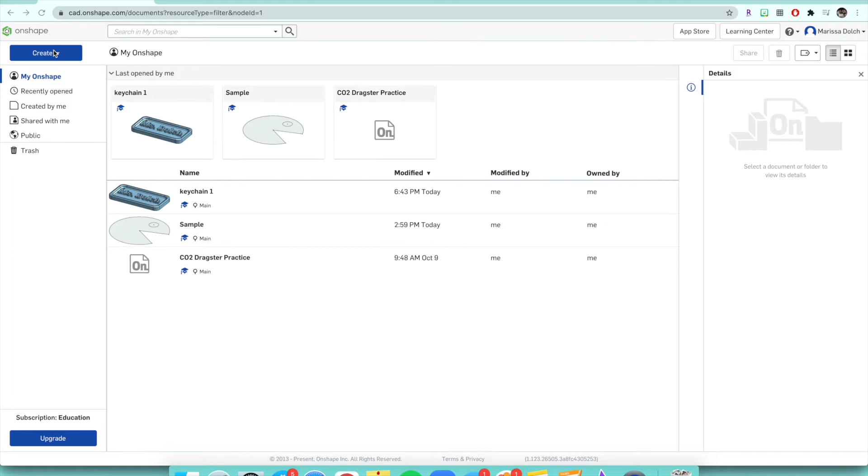But to get started, what you're going to do is click Create, which is the blue button on the top left. Then you're going to click Document to create our new file. You're going to put your last name and keychain, then click Enter or OK, and it'll load your workspace.

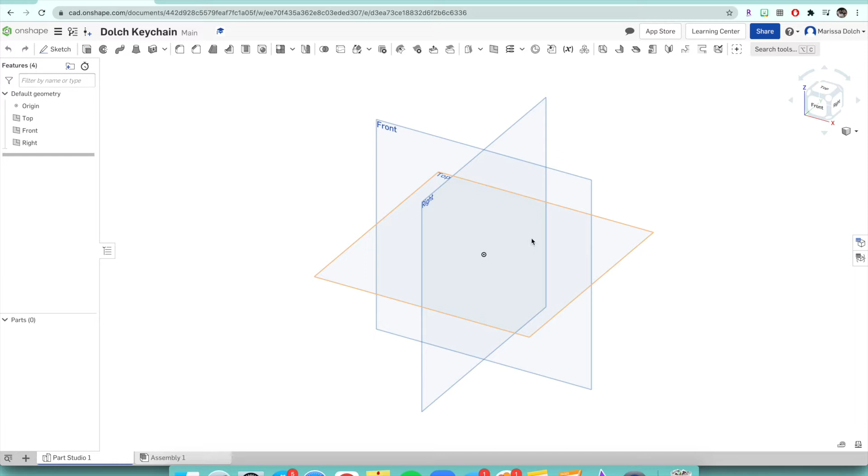So now since we have our workspace all loaded, like I mentioned before, I like to use the top view on the view cube in the top right corner, and it just snaps right to it, so it's kind of looking down on your design from the top, like a bird's eye view. So now what we have to do is select our top view and click Sketch to create a sketch on that top plane to get started.

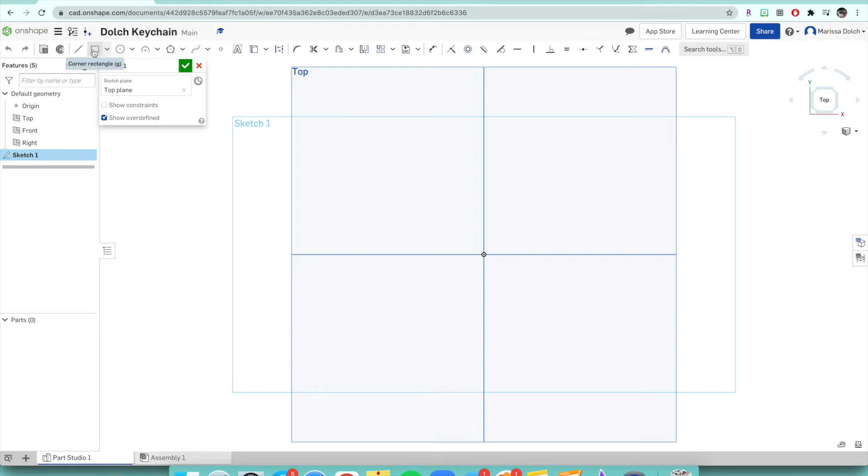So we're going to be making a rectangular keychain. What you're going to do is come over here to the rectangle button, and you're just going to drag a rectangle on. Click once to start dragging and click again to snap the rectangle onto the sketch. Now what we're going to do is dimension this rectangle.

What you have to do is go up to the dimension tool, and you're going to click on one line and bring up a dimension for it. Doesn't matter where it goes. You're going to make this dimension 3, for 3 inches. Then you're going to click on the width of this and make it 1.5 inches. And it should look like this.

Now what we're going to do is round out the corners of our keychain because we don't want it this pointy. So the tool that we're going to use for this is the fillet tool. What this tool does is rounds out corners so they're smooth and not as pointy.

So to use this tool, I'm just going to click on it, and I want to round out this top left corner of my rectangle. So I'm going to first click on this line, and then click on the other line that it connects to, and it'll round out the corner. You'll see that blue line where it's rounding.

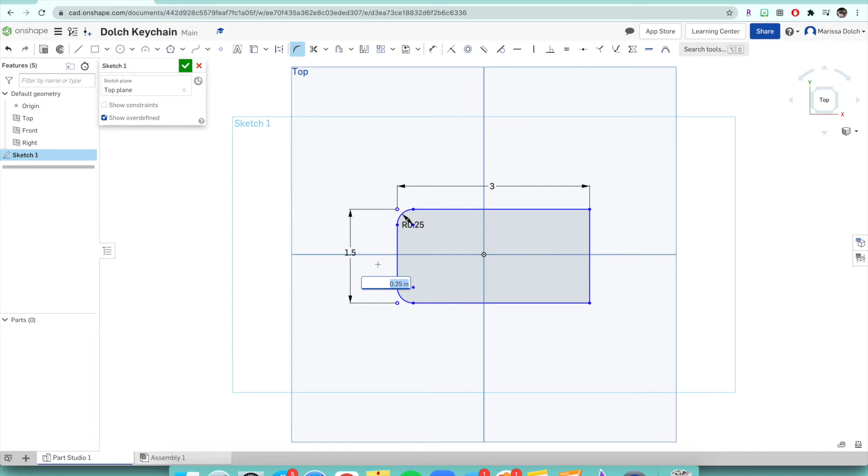We're just going to keep it the dimension that it's preset to, that it defaults to, which is nice. So you're just going to click Enter, or click off to the side, and it'll change it to make it round. You're going to do the same thing with the other corners, and just keep it the default, so you should be able to do this fairly quickly. And you're good to go.

So now what we're going to do is create an offset, so there's like a little ledge in your keychain. What you're going to do is on the top, two buttons to the right, there's an offset tool. You can click on that offset tool, and this is how you're going to make your ledge.

You're going to click on your edges, and right now you could just leave it how it is, and when it pops up the dimension box, you're going to make it 0.125, so that's 1/8 of an inch from the outside edge. You'll see now it moves a little bit closer. So that's a nice edge.

So we're going to do that to every single side. So again, 0.125.

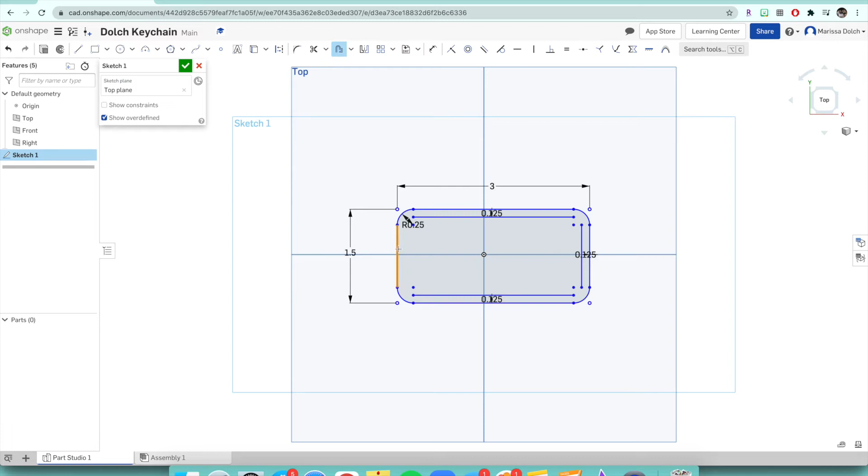And you'll see here for this one, the line looks like it's outside of the drawing. So to make it go inside, because we want it on the inside of the keychain, not the outside, you'll just click on this arrow and it'll move right in there. So when you click Enter, it'll still pop up with that box. Same thing with this one: just click the arrow inside, click Enter, 0.125, Enter, and we're good to go.

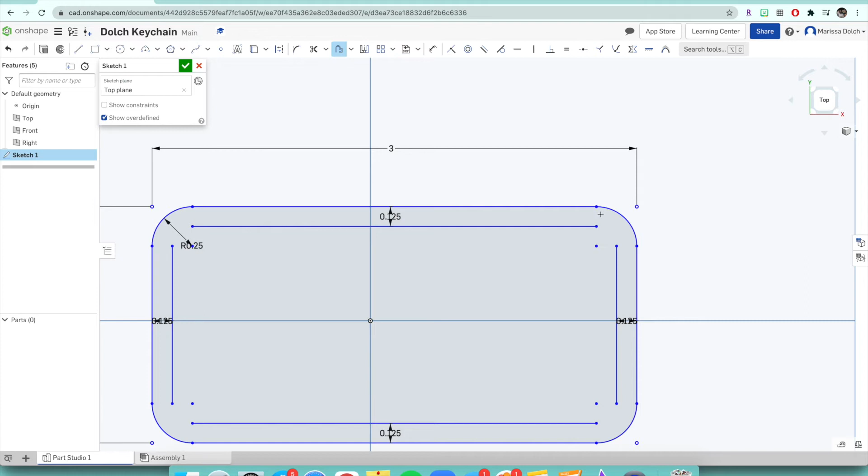But now if you look closely, this is a big gap. So we're going to do the same thing we did up here with the fillet tool and create a curve between these two lines.

So again, I'm going to click on the fillet tool. I'm going to click on one of the lines, then click on the connecting line where I want it to go. Click enter. We'll keep it the same exact default dimension, so you don't have to do anything there. And you're just going to go around to each corner and round it out.

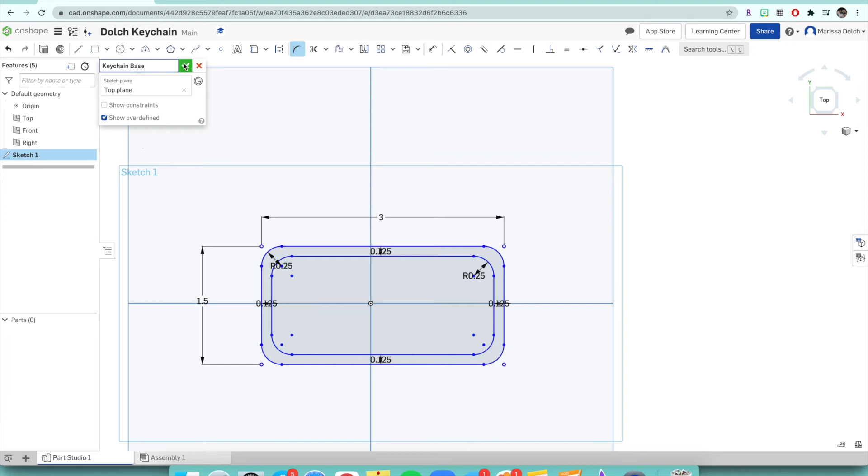Alright, so once you have that all done, our one sketch is complete. You can see up here it says sketch 1. I'm going to name this, just so I can keep organized, Keychain Base, just in case we have to come back and edit it. Once you're done, click the green check mark, and you'll see that our sketch is good to go.

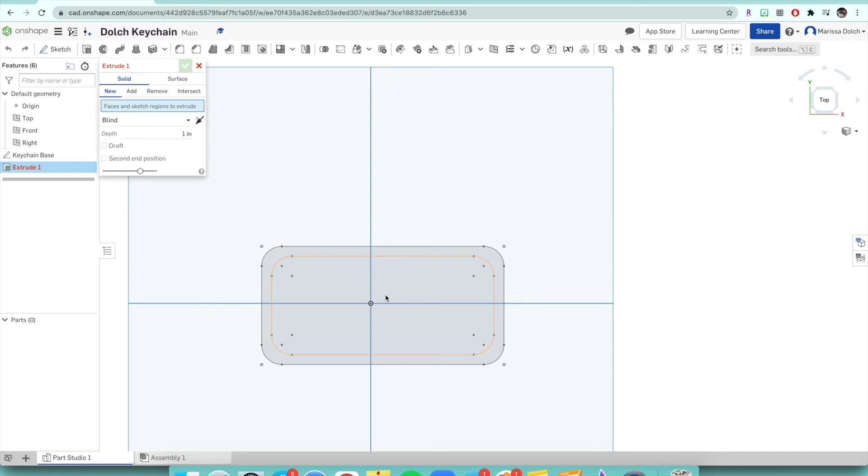So now what we're going to do is extrude our sketch. The extrude button's right up here, so click on it. Now we have to select a face, the part of the sketch we want to extrude or add material to. First we're going to do the inner piece. When you move your mouse to the center of your keychain, the inner line becomes yellow, so that's what you want. Once it becomes yellow, click, and it'll shade a dark gray. Then you're going to change this depth to 0.125, and click enter. You won't really notice a difference.

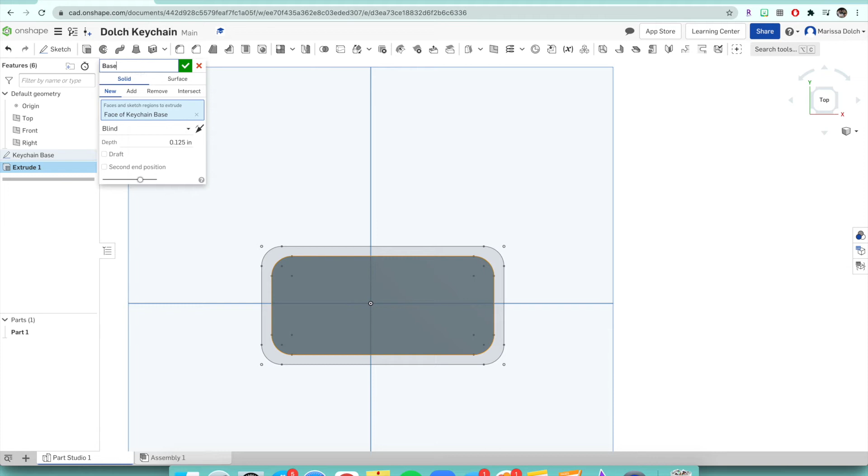Let me just rename this also, I'm going to name it base. You won't really notice a difference yet. I'll move around, but you can see once I move the sketch that it has become a 3D object. It's not just a 2D dimensional drawing, which is kind of cool.

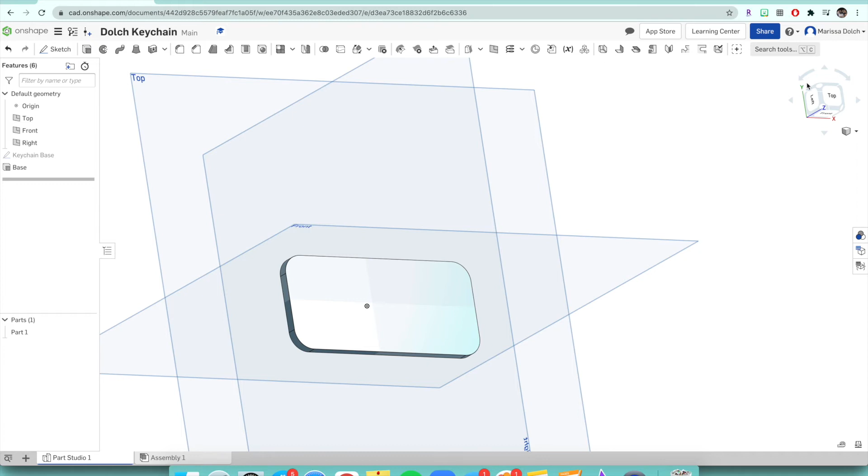But now if we look, your drawing disappeared, right? Don't get nervous that your drawing disappeared. All you have to do is, you'll see over here where we put keychain base, if I hover over it, you'll still see the drawing on the screen, but it won't be there because right now it's hidden. So we want to show that by clicking on the eye, and you'll see it pops back up for you.

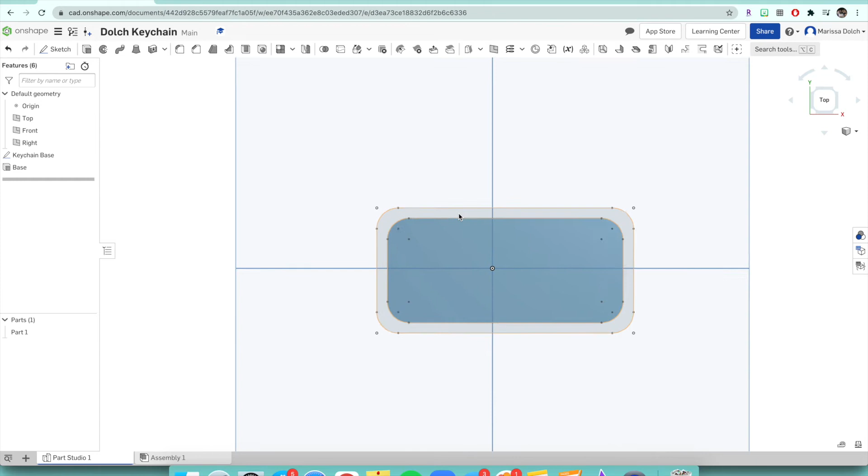So now we have to do the outside. What you're going to do is hover in between that middle light gray. Let me get a little bit closer here. You're going to click extrude. Now for this one, because this is our ledge, we want to add materials. 0.25, and you're just going to click enter, and it should extrude it.

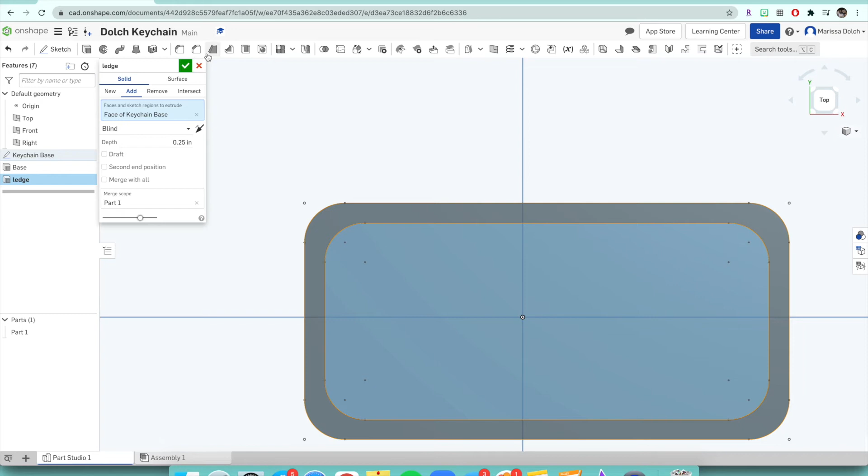So I'm going to rename this before I take a look at it. I'm just going to name it ledge, just so I know what I did. And now if we take a look, you have a nice little ledge that popped up for your keychain.

So now what we're going to do is add text in the middle of our keychain. To do that, we're going to select the surface we want it to be on. Of course we want it to be on the base. And then we're going to make another sketch. Right off the bat, I'm just going to name this text so we don't get confused. Click enter.

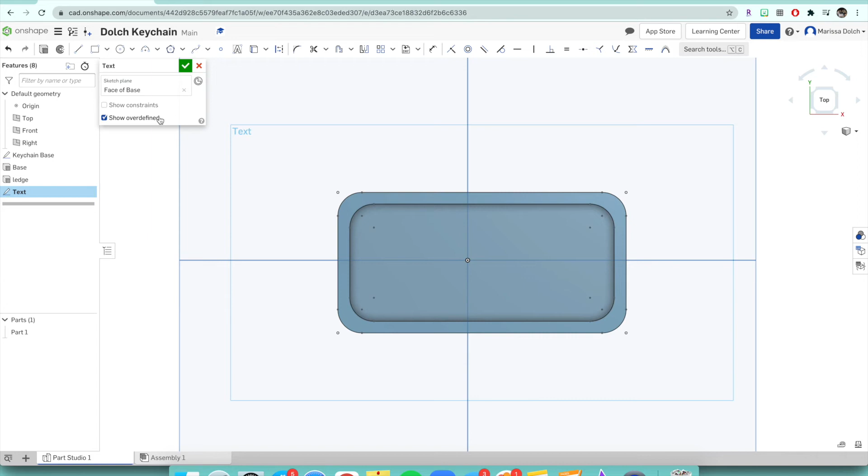Then we're going to go to the text tool. The text tool is right up here, it's like a little A. What you're going to do when you get to that plus, like we've seen with the other tools, is click and drag a text box. Once you let go of dragging that text box, you'll see over on the left, another box came up for you to actually type what you want onto your keychain. So I'm just going to put Ms. Dolch, but you could put your name, your nickname, your last name. It's up to you. You could also change the font.

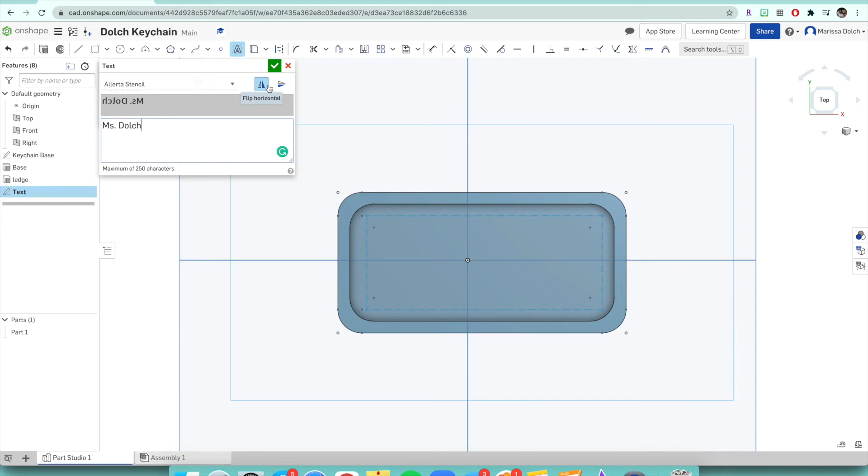So I'm going to do that, I'm going to do this one. Change the font. This one doesn't have the option to make it bold, but sometimes you can make it bold. You could flip your text, and you'll see the preview here in this little box. So you can flip it, it's up to you. Once you're done, you're going to click that check mark, and the text comes up really, really big, which is okay.

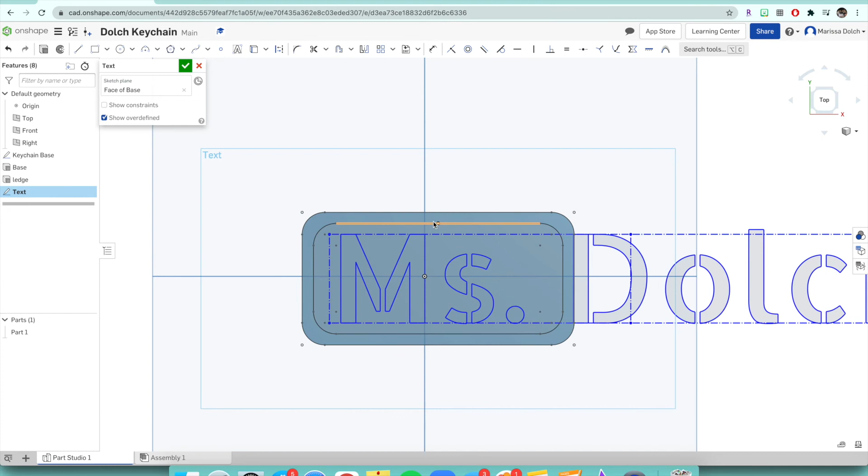So what you're going to do is zoom out to see your text fully. If you look, I'll zoom in a little bit more, there's a dot in the center of your text, that's the midway point of the text. Also on your design, there's a midway point, which is another little circle. So what we're going to do is match up these two little circles so they're even. Click on the circle, hold, and then drag it.

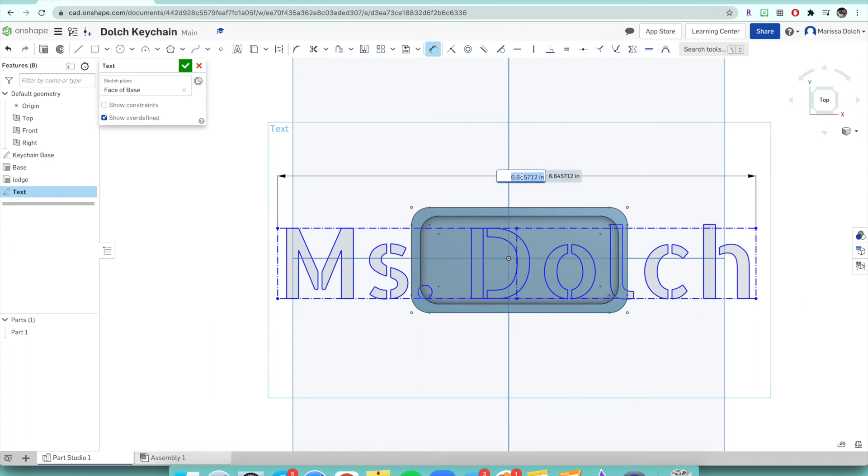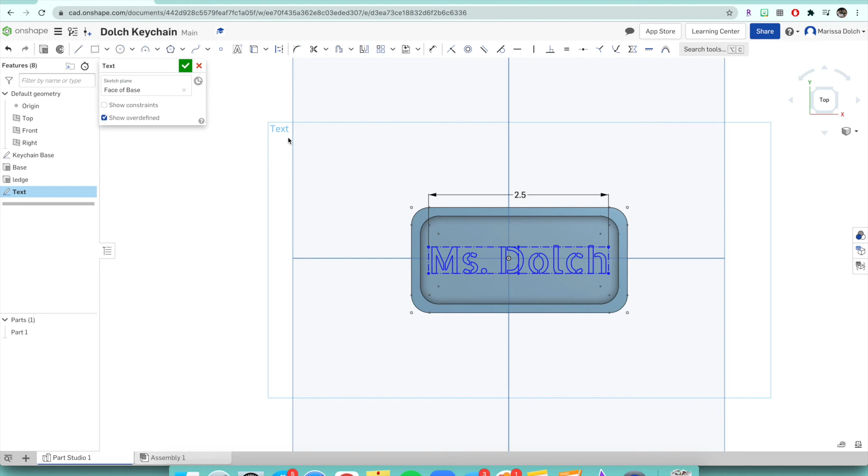You're going to just drag it and try and get it to the center as best as you can. Once you're done, click the check mark and you'll see it outlined in gray.

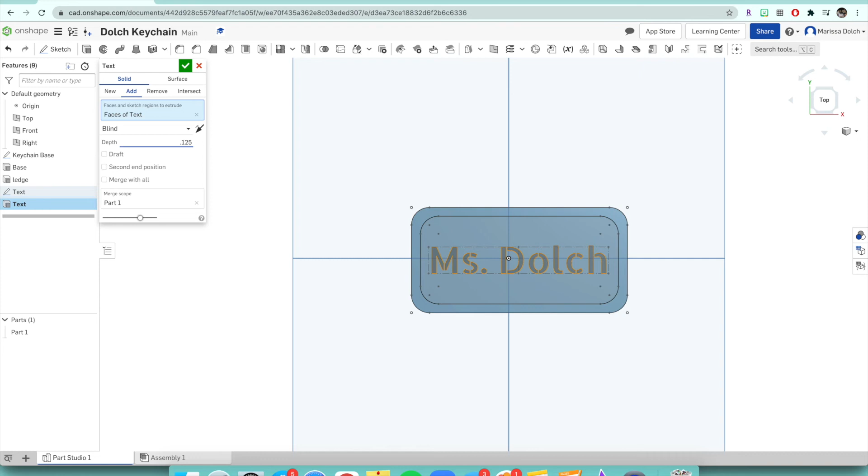Now what we're going to do is extrude our piece of text so it pops out of the keychain 3D. Click extrude, click our text, and you'll see it's going to extrude the text. I'm going to name this. It already says add, so we're good there. We're going to make it add 1/8 of a material like we've been doing for the others. Once you're done, click the check mark again, and we can see if I rotate this that now it's extruding out and it looks kind of cool.

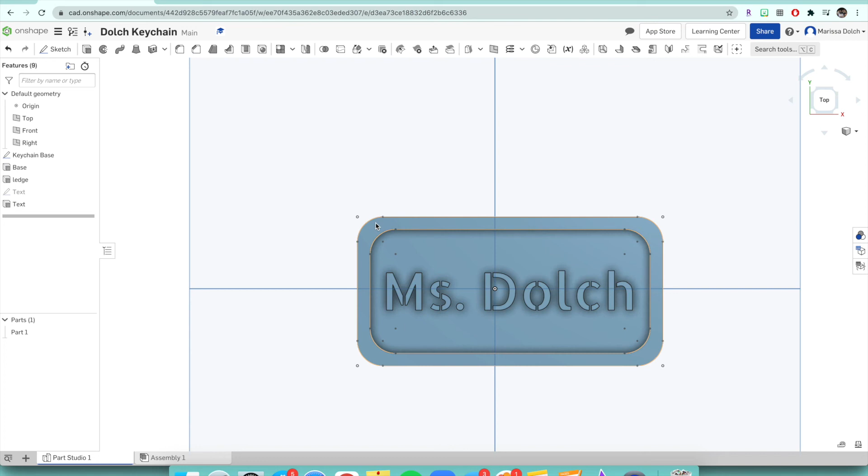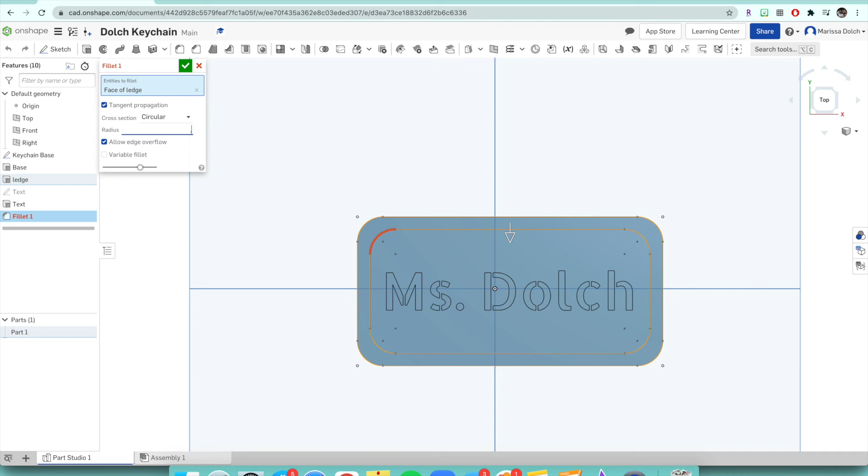Now what I want to do is show you how to round the outside and inside of your keychain, just so it has a smoother finish. We're going to do a fillet on the outside edges of this rectangle. Click kind of in the middle again, just so that outer piece or ledge lights up in yellow, and then click the fillet tool. Change it from 0.2 to 0.05. Click enter, and you'll see now that it made the ledge smooth it out so it looks cleaner.

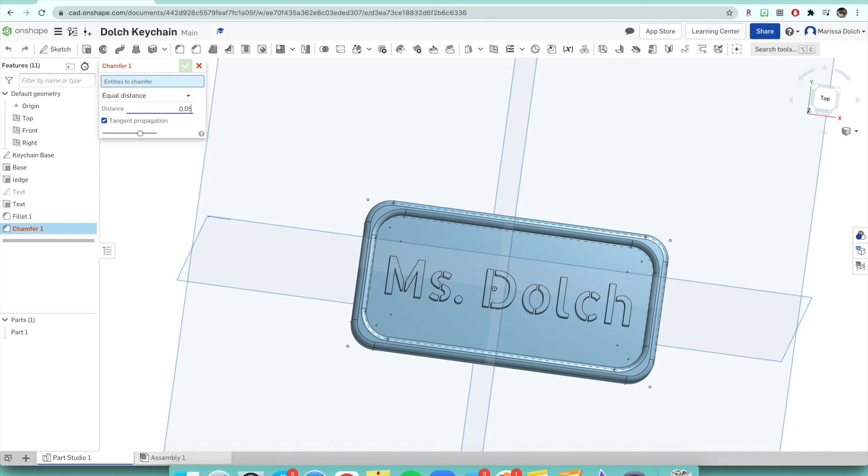Now we're going to add a chamfer right here on the inside edge of the ledge, just so it kind of looks like a slide and looks a bit smoother as well. Click on this ledge right here, click on chamfer, which is the next button next to fillet, and make it 0.05 again. You might have to click on the ledge again like I just did. Let me click on this so you can see better. If I zoom in, you can see that it looks like a slide and it dips down, so it's a more smoother edge.

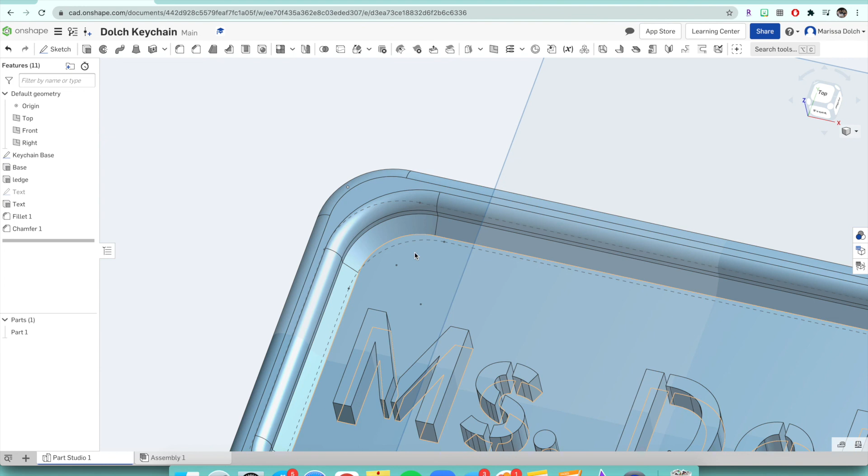Now the last thing we're going to do is we need a hole for this keychain, of course. I'm going to make my hole in the upper top left-hand corner of the keychain. I'm going to go back to my top view, zoom in slightly just so you can see this better, and click on the face where the hole is going to go. I'm going to click sketch, rename this to hole, click enter, and then get my circle tool.

I'm just going to draw a circle over here, kind of want it about 0.13. So 0.13. You could move it if you want to, you can make it bigger, you can make it smaller, it's up to you. I'm going to leave mine like this.

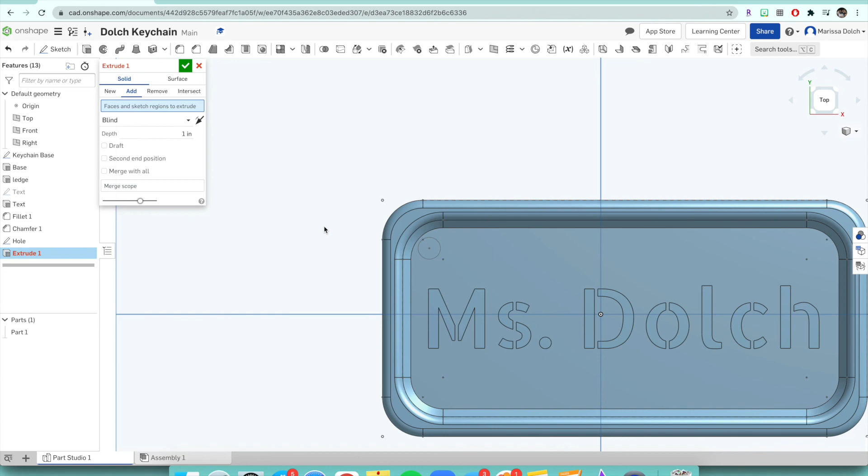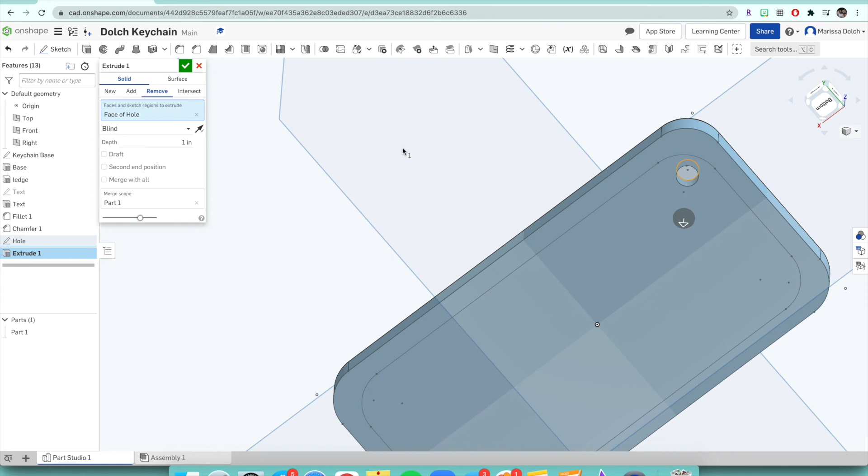Then what we have to do is cut through so we could actually make a hole. So we're also going to extrude this. Make sure that you have both parts highlighted, and click extrude. This time, I know we've been adding for the last couple of times, but we don't want to add material, because if we add, you'll see that it's coming out of our keychain, and we want to take away. So we want to click remove, and you'll see it's going the opposite way now, but it's creating a hole through our keychain, which is what we want to see. Once we have that, we're going to click the check mark, and you're good to go with your keychain.